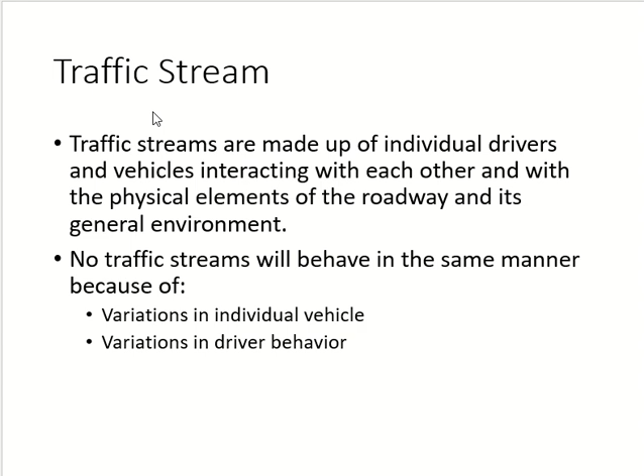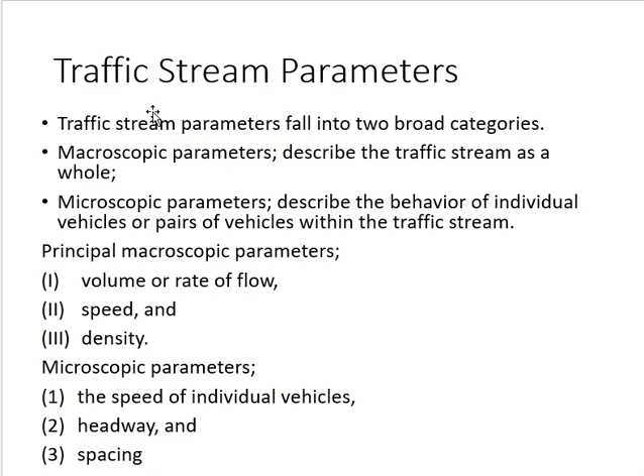Okay, we started this topic last time, which is about traffic flow and traffic flow characteristics. We discussed what we mean by traffic stream, what are the major reasons of variation in traffic flow, the types of highways according to traffic flow, and the types of parameters. So we have macroscopic, which is the big one, and microscopic, which is the small one. And in each one of them, we have three parameters, and we started with the macroscopic parameters.

We started with the first macroscopic parameter, which is volume. And there are two more things related to volume, which are flow and flow rate. All of them have the units of vehicles per unit time. Which one of them can be per hour? Volume. Okay, which one of them can be per day? All of them can be per day.

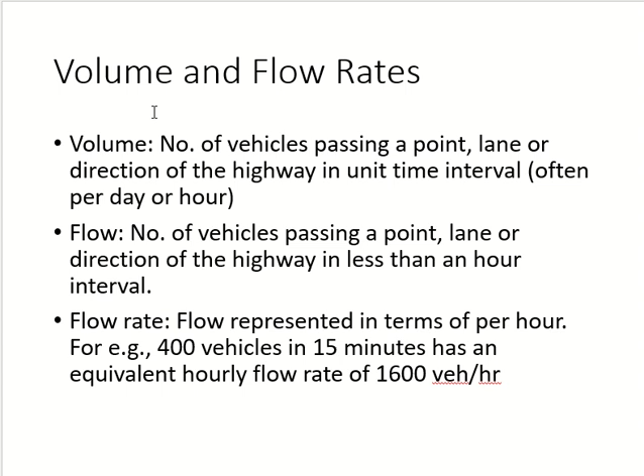Per unit time. Why did you say volume for 1 hour? Which one can be per day? Volume for day, flow for less than 1 hour. Yes. Flow rate when we convert to volume. Very good. Agreed? So volume can be per day or per hour. Flow is less than 1 hour, and flow rate is per hour but converted. Not can be, it is converted. Without conversion, it remains flow. Flow rate has to be converted.

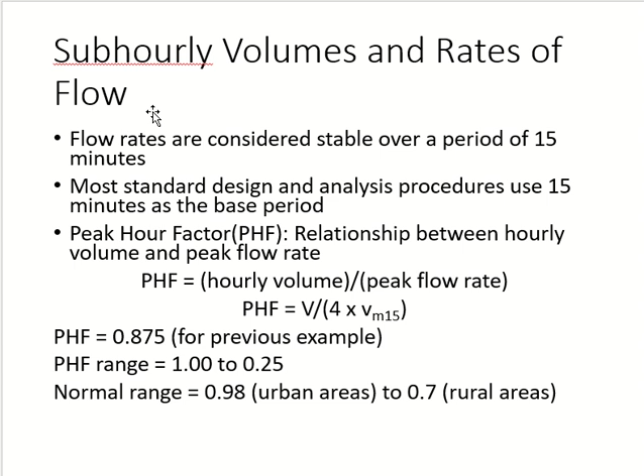And we discussed where we use them, and we discussed the case of flow and the peak hour factor as well. Today we'll move on to the next macroscopic parameter, which is speed and travel time. Throughout this course, you will see the speed and travel time are discussed together. Why? Because they are linked with each other. What is the relationship between them?

Distance per unit time, both of them. When speed increases, the time decreases. Yeah, so if one thing increases and the other one decreases, what do we call this relationship? Inversely proportional. They are inversely proportional, and you can calculate one from the other. If I give you travel time, you can calculate speed. If I give you speed, you can calculate travel time.

Now, when we say travel time, it cannot be for a short distance. You can call it time, yes. Travel time is between place A and place B, two different locations. You cannot say, I will take travel time for 10 meters. It will not be even 1 second for a car. So travel time is taken for locations which are far from each other. Clear?

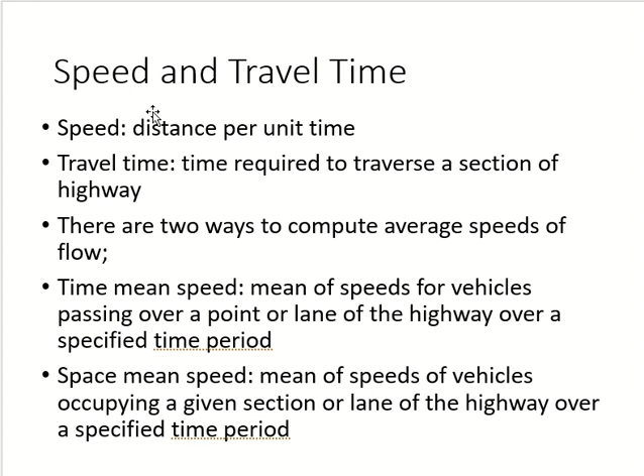Space mean speed, the problem is I have to take the speed at all the points, right? How many points in a section? Many points, yes, many points. A point is just a dot, right? I can have a new dot after every millimeter. Even for one section which is very short, you can have millions of points. So to get the speed at all the points, even for one vehicle, is very difficult, almost impossible.

So now what do we do? We use these equations to calculate time mean speed. The equation is very simple: D upon T is the speed of one vehicle. Summation of all the speeds divided by number of vehicles gives time mean speed, TMS. If you have the radar or device which gives you the speed, then I will not do d upon t, I just put in the value of the speed. D upon t represents speed.

In the second case, I wanted the speed of the entire section, right? I cannot have the speed of the entire section because I cannot measure it. So what do I do? I can measure the travel time of the entire section. I cannot measure the speed, but I can measure its travel time - when did you start, when did you finish?

Now that travel time has all the speeds, right? We said the speed goes higher, travel time goes lower. So maybe in the first 10 meters the speed was high, travel time is lower. Then the vehicle slowed down, travel time became higher. Then slowed down further, travel time became higher. Then it accelerated, travel time becomes lower.